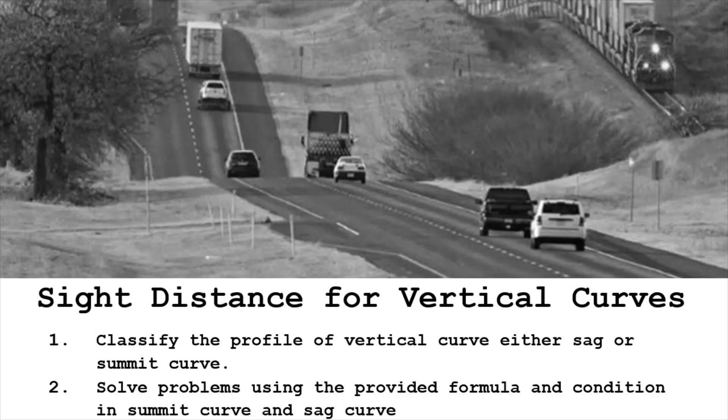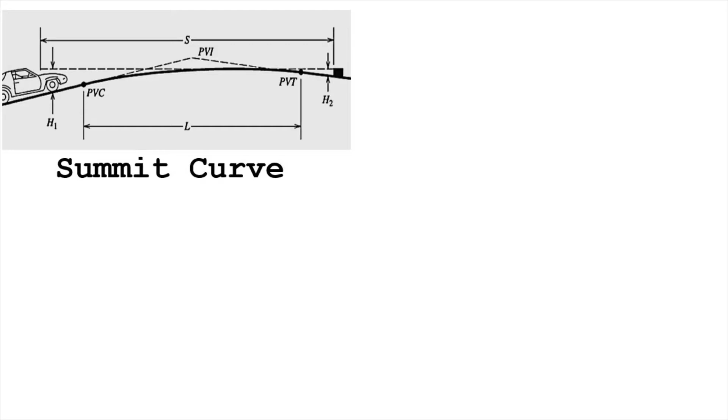Okay, so when the convexity of the two grades is upwards, it is referred to as a summit curve. And when the convexity of the two grades is downwards, it is referred to as a sag curve. In practice, we should make sure that the transition between these two grades is smooth and safe. The use of parabolic curves in vertical curves was found to be excellent in providing riding comfort.

Another design consideration in laying out vertical curves is the sight distance requirement. On our figure, it is the one denoted as S. The length of the sight distance should be sufficient to ease the shock due to the change in gradient. So that's what we are going to solve here. So here are our formulas.

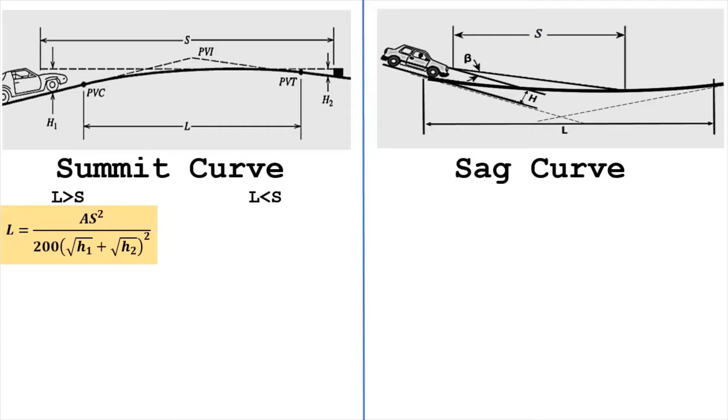In summit curve, when L is greater than S, our formula is L equals AS squared all over 200 times the quantity squared of square root of H sub 1 plus square root of H sub 2. And when L is less than S, our formula is L equals 2S minus 200 times the quantity squared of square root of H sub 1 plus square root of H sub 2, all over A.

L is the length of the summit curve, S is the sight distance, H sub 1 is the height of the driver's eye, H sub 2 is the height of object, A is the algebraic difference in grades, and if H sub 1 and H sub 2 are not given, H sub 1 would be 1.143 meters and H sub 2 is equal to 0.15 meters.

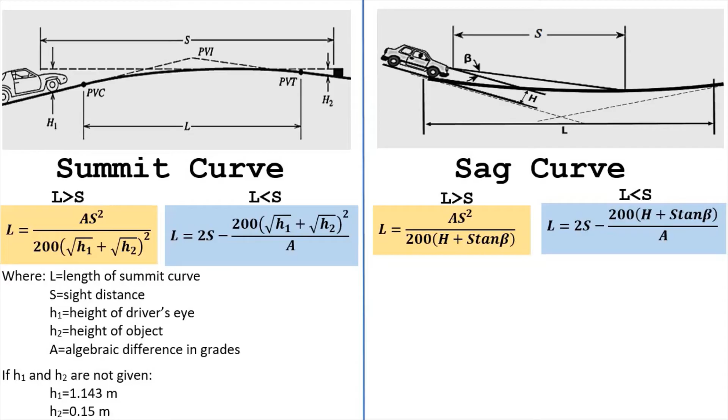For sag curve, if L is greater than S, our formula is L equals AS squared all over 200 times the quantity H plus S tangent beta. And if L is less than S, L equals 2S minus 200 times the quantity H plus S tangent beta all over A. L is the length of the sag curve, S is sight distance, H is the headlight height, beta is the angle of light beam, A is the algebraic difference in grades.

If H and beta are not given, here would be our formula: L is equal to AS squared over 122 plus 3.5S if L is greater than S, and if it's less than, our formula would be L equals 2S minus (122 plus 3.5S) over A. So just memorize those formulas and let's start solving some problems.

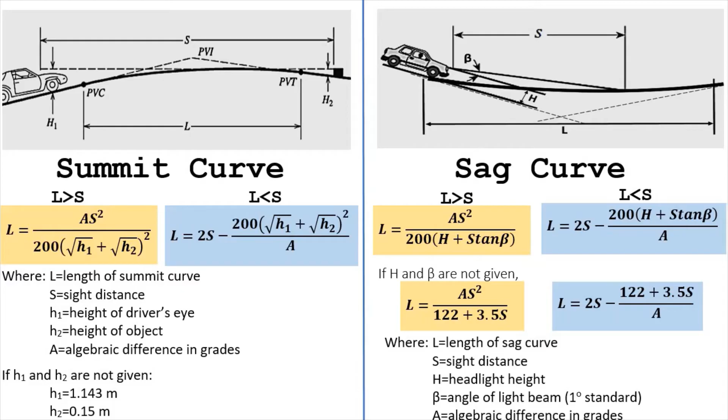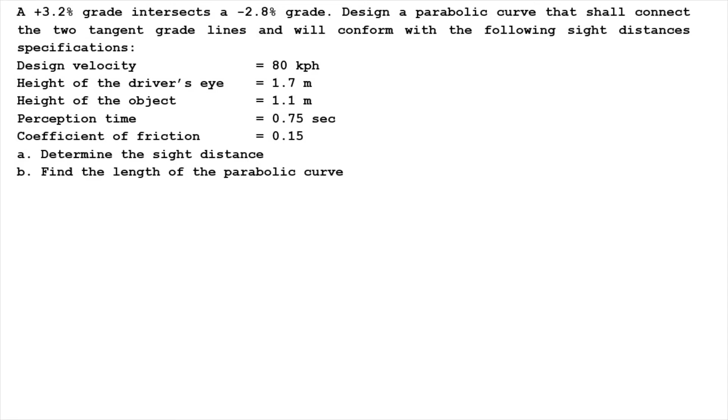Okay, so here's our first problem. Pause it to read. In the first sentence, we have two grades, positive 3.2%, which intersects another grade of negative 2.8%. From those grades, positive, going up, and then negative, going down, so we are considering here a summit curve. The design velocity is 80 kph, the height of the driver's eye 1.7 meters, the height of the object 1.1 meters, the perception time 0.75 seconds, and the coefficient of friction is 0.15.

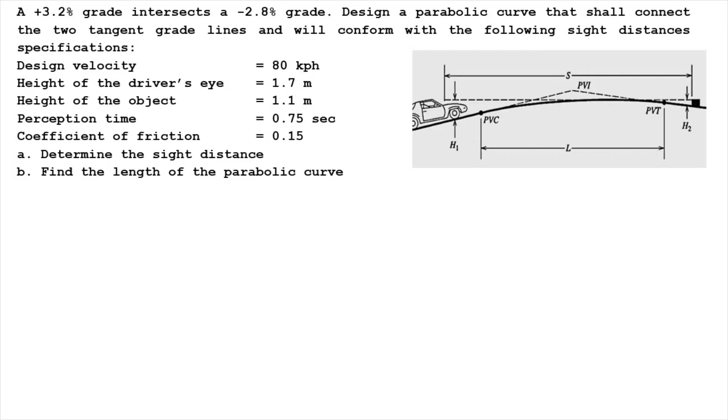First requirement, let us solve for the sight distance. Our formula for stopping sight distance is S equals Vt plus V squared all over 2g times the quantity f plus G. Let us substitute the values to solve for S. For V, we have 80 kph, converted to meters per second by dividing by 3.6. For t, the perception time, it's 0.75 seconds. g is 9.81. And the coefficient of friction, f, is 0.15.

For G, which is grade, we have two grades, positive 3.2% and negative 2.8%. Take note that we will just choose the 3.2% grade, since we're considering from G1 to G2. 3.2% in decimals is 0.032. Now let us solve. The stopping sight distance S is equal to 154.96 meters. Now let us solve for the second requirement, which is to find the length of the parabolic curve.

If we go back to the formulas for summit curve, we have two: a formula when L is greater than S, and a formula when L is less than S. Our solution process is to first make an assumption. If we assume L is less than S, we use the formula designated to it. If our assumption is correct, that would be the answer. If not, we need to use the other formula. So let us try first L less than S.

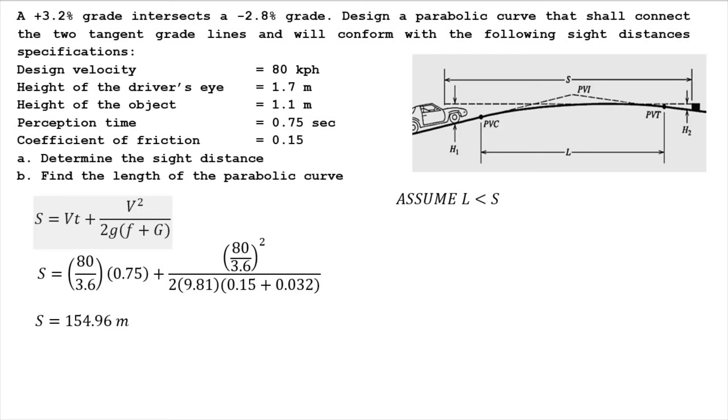Assume L is less than S, so our formula is L equals 2S minus 200 times the quantity square root of h sub 1 plus square root of h sub 2, squared, all over A. Substituting: S is 154.96, h sub 1, the height of the driver's eye, is 1.7, and h sub 2, the height of the object, is 1.1. A, the algebraic difference of grades, is the absolute value of 3.2% minus negative 2.8%.

Let us compute. L would be equal to 125.42 meters. That's not yet our final answer. We need to confirm our assumption. We assumed L is less than S. The value of L is 125.42, and the value of S is 154.96.

So we can confirm that L is really less than S, because L is just 125.42 and S is greater, with a value of 154.96. Therefore, our assumption is correct. Again, once our assumption is not satisfied, we need to use the other formula.